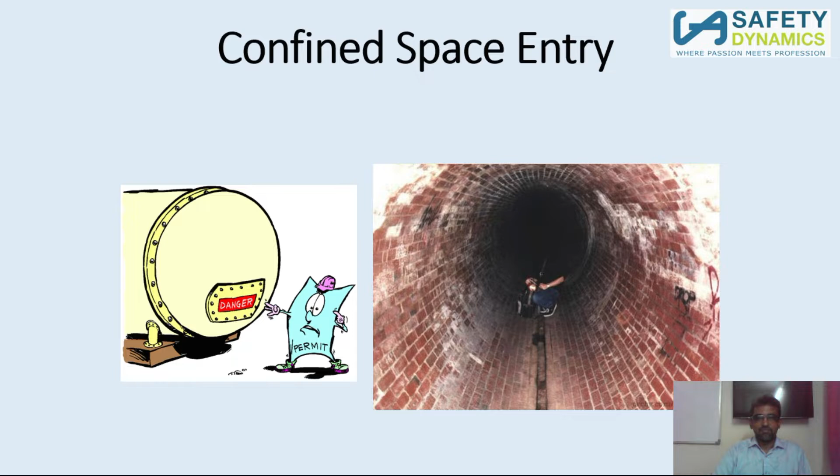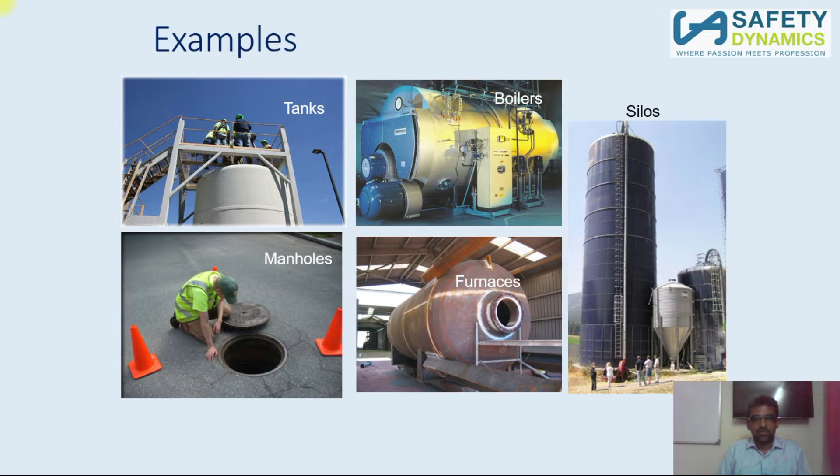Just see here. These are the types of areas. You can see tanks, boilers, silos or manholes. These all come under confined space mainly. That means the entry and exit could be a problem. You can also see sewers, septic tanks, pipes, cable galleries or trenches.

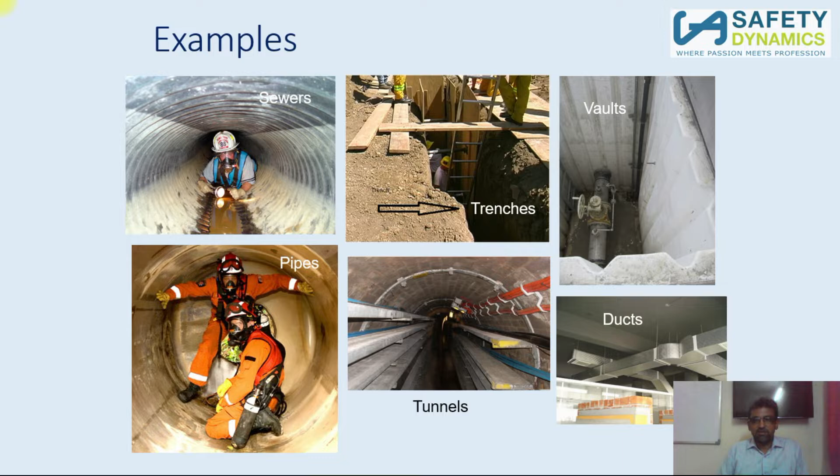Even an excavated surface. For example, in a construction area, when you're doing an excavation, up to a certain number of meters it could be taken as confined space. So we need to be all the more careful when getting inside the pit or any other areas. And ducting, for example, during air conditioning servicing or maintenance, when you are going inside the ducting, that is also termed a confined space.

There are two different roles in the confined space. One is called the entrant, the other is called the attendant. The entrant is supposed to go inside the confined space, and the attendant's responsibility is to ensure that he is safe. In case of any problem to the entrant, he must be in a position to rescue him. That's very important. He is not supposed to go inside.

Psychologically, there is a misconception that the attendant should also go inside. The attendant is not supposed to go inside. He must be waiting outside, and in case of any problem to the entrant, his ultimate responsibility is to ensure that the entrant is saved. So that is one important thing.

That is why in many areas worldwide, the attendant must have the knowledge and understanding of the entire nuances of English. He must have the capability and competence. A person who is not able to read and write English may be fit as a confined space entrant, but he will not be given the task of attendant.

Because as an attendant you need to check the oxygen supply, the level of oxygen, whether there are any contaminants, and how many people are inside. The logging, the logbook, everything should be maintained. So for that you need to have a basic understanding of language.

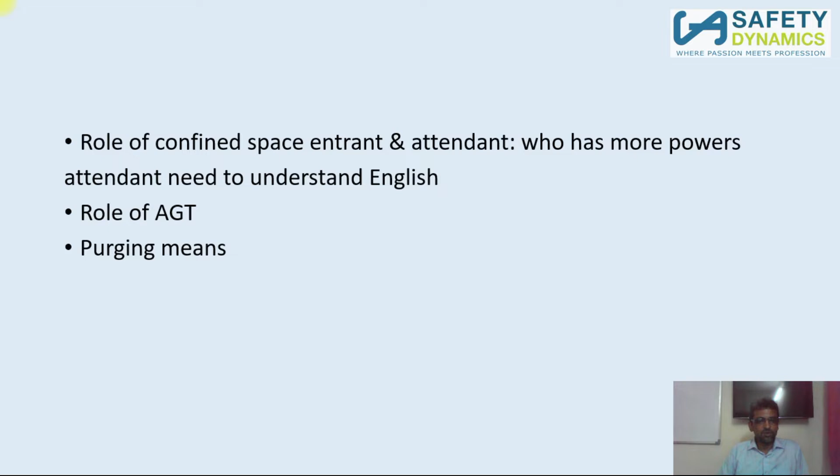One more important thing is the AGT. The AGT is nothing but the authorized gas tester. He is supposed to check the entire contaminant level and whether any toxic gas is present. Those are the things he is going to check.

And purging. Purging is a mandatory, important thing which is supposed to be done before entry into the confined space. Normally contaminants will be there. How will you remove the contaminants? It's a process of dilution. You remove the entire contaminants by diluting them with some other gas.

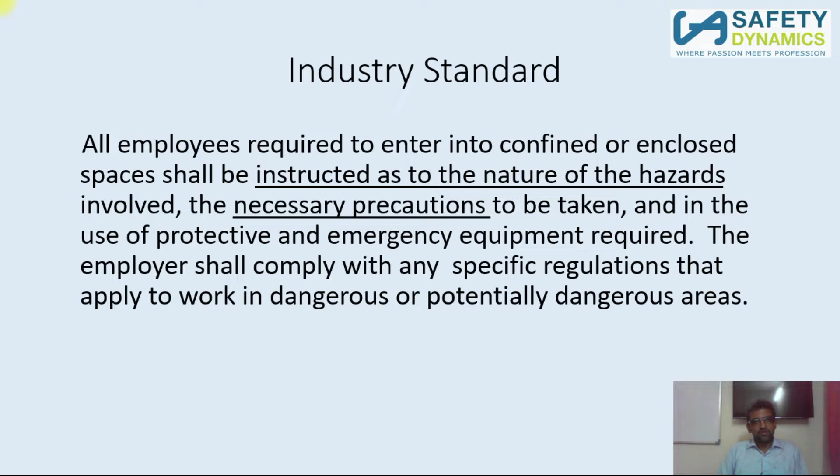What gas could be used? The best gas is N2. Pure N2, nitrogen, can be used because it will not react with any other gas. It's an inert gas. In some areas pure air can also be used. And precautions are taken.

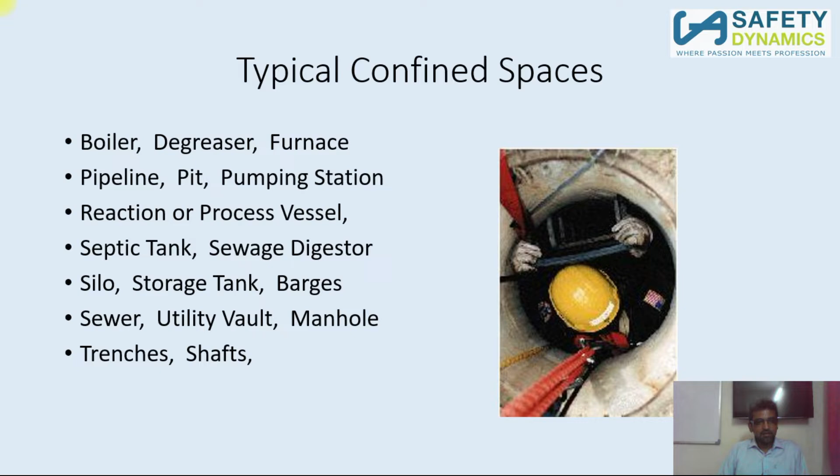And you know the sewage treatment, like water manholes, people getting in the manhole and cleaning, scavenging. So these are all coming under confined space. And limited openings for entry and exit, and unfavorable natural ventilation. Natural ventilation may not be able to enter properly. So that is an important thing.

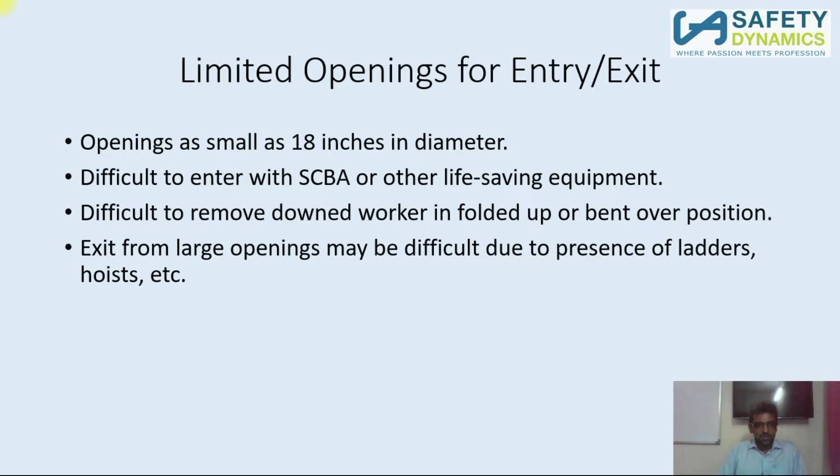And how about the entry? What could be the maximum diameter? When it is smaller than 18 inches, smaller than 1.5 feet, then that could be termed as confined space. And difficult to enter, the SCBA is very, very important. SCBA is nothing but the personal protective equipment that we'll discuss later towards the end of the session.

And the confined space definition, let us understand very clearly: it is large enough that an employee can enter and perform assigned work. If you are not able to enter inside, then there is no question of confined space entry. So it should be large enough, at least 18 inches, to enter, number one. It has limited or restricted means of entry and exit, that is second. And the third parameter is, it's not designed for continuous employee occupancy.

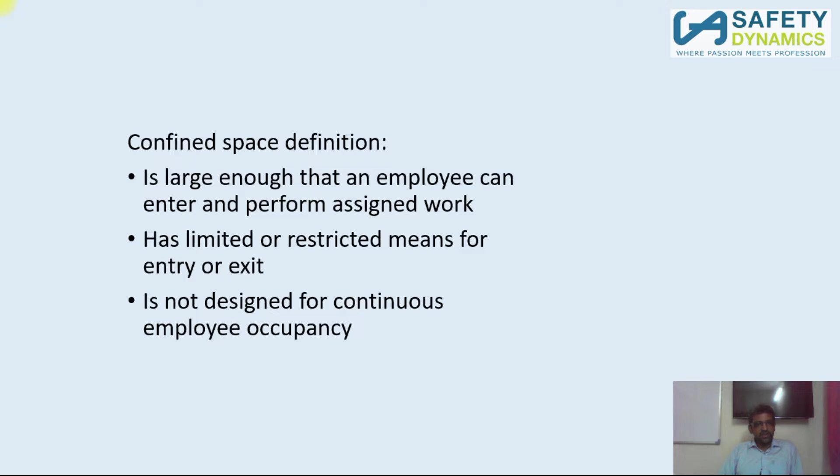So when any entry and exit falls under these three categories, that could be termed as confined space, and all the control measures should be taken care of in a sequential manner without any tolerance. So understand that. And this talks about the hazardous atmosphere. What are the hazardous atmospheres you will have?

There can definitely be fatality and impairment of ability, because if there is a toxic gas, it reacts with your hemoglobin. In the blood we have hemoglobin and oxygen. Hemoglobin is a fantastic guy, but the bad property is it has a greater affinity towards other chemicals than oxygen. If carbon monoxide is a contaminant, it reacts with carbon monoxide and creates carboxyhemoglobin. If there is H2S, hydrogen sulfide, it reacts with H2S and forms sulfhemoglobin.

So the reaction is so rapid that the person who is working will never be able to do the right thing. He will not be able to come out. So that is where we have to be careful. And engulfment is when suddenly some chemical or flowing solid or semi-solid content comes and swamps you totally. You wouldn't be able to do anything. These are the hazards we need to understand. And at no point of time should even 1% tolerance be permitted.

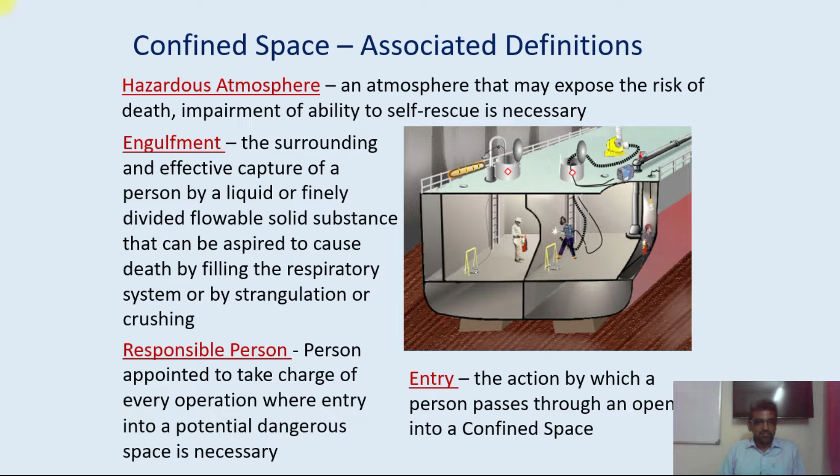Whenever there is an entry, you need to be wearing a proper coverall, safety shoes and the helmet. These are the primary requirements. Apart from the secondary protection, the final protection is the SCBA, and the tripod and the barricade should be there, and there has to be a notice. The signage should be kept very clearly that permit work is going on. And within the barricade area, I am not talking about the entry of the confined space, I am talking only within the barricade.

If somebody comes inside the barricade area without wearing the self-contained breathing apparatus, that is termed a dangerous occurrence. That means it is more than a near miss. A near miss is of lighter intensity, but a dangerous occurrence is of higher intensity which can result in death and fatality. So just understand the seriousness here. And it is not about the respirator; I am talking about the SCBA that should be worn.

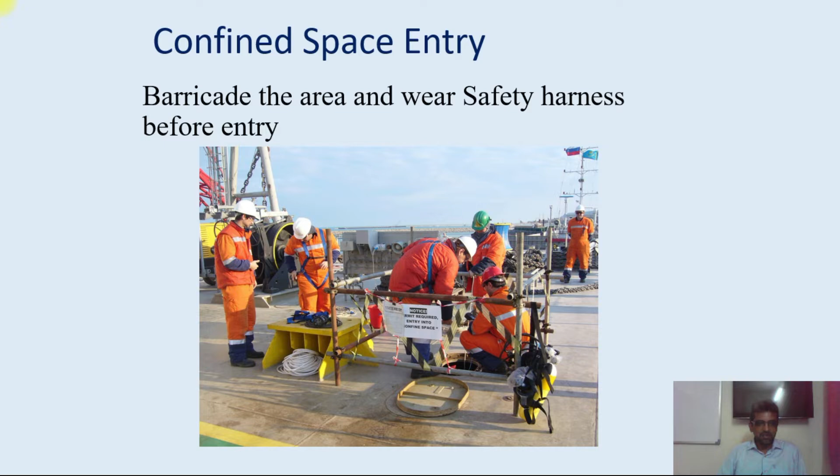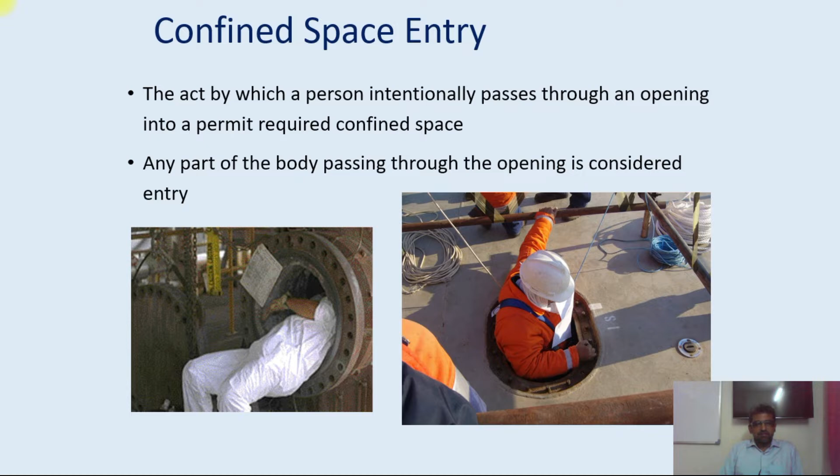As far as entry is concerned, there are two different ways of entry: horizontal entry and vertical entry. In case of horizontal entry, the person can go inside and come out, not a problem. He may have to bend himself to enter. For vertical entry, you need a tripod with a winch arrangement, and there has to be a rescue arrangement on the top. He must be wearing the SCBA to go down, and somebody else has to be available on the top to pull him out.

And what is the amount of oxygen we require for survival? It is 19.5%. When the level of oxygen goes down below 19.5%, it is called oxygen depletion. That means the level of oxygen comes down. When it is going beyond 23.5%, it is called oxygen enrichment. Either this side or that side, both are equally dangerous. When it is going below 19.5%, it can cause death. When it is going above 23.5%, then also it can cause death.

So what is the survival level? The optimal level is between 19.5 and 23.5. And as far as the confined space is concerned, there is one thing called IDLH, immediately dangerous to life and health. So what is that level? It is nothing but 17.5. 19.5 is the adequate thing. Up to 17.5% probably you can tolerate. After 17.5, the entire concentration is coming under immediately dangerous to life and health.

So you have to keep on monitoring the gas detector. By chance the oxygen level comes down below 19.5, you have to be cautious. When it comes down to 17.5, you have to come out immediately. There is no chance. Otherwise, you are playing with your life. So let us not do that.

And what are the combustibles? The most hazardous chemicals are hydrocarbons. There are methane, hydrogen, acetylene, propane, butane, isobutane, LPG. All these are your combustibles wherein you have to be careful while dealing with all these things. And there could be some toxic materials that we have discussed, and then electricity could be there, mechanical hazards can be there. Imagine you are doing some welding work inside the confined space.

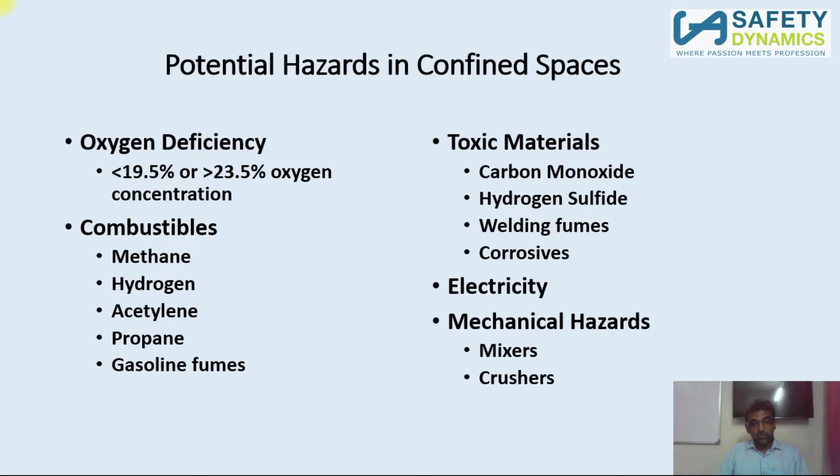Now at that point of time, as you are doing the welding, the fire spark consumes oxygen. So the available oxygen is already consumed, and at the same time you are also in the confined space, your oxygen level keeps on coming down. That means you are playing with your life. So by chance the oxygen level comes down below 19.5%, you have to be cautious and you have to ensure that you are coming out. And then only after dilution, only after ventilation with the blower and other things, then probably you can enter. Only after checking whether the oxygen level is sufficient as per the gas detection monitor.

Okay. So this is one simple example of how the oxygen is taken in the blood cells and how the CO2 we leave. Now the human body requires oxygen to carry out cellular metabolism. Without this you can't do anything. You will never be able to do anything. And how many minutes can we survive without oxygen? Imagine your entire mouth and nose are closed. How many minutes can we survive? Maximum just 4 minutes. 1, 2, 3, 4. That's all. Just 4 minutes we can survive. Not beyond 4 minutes. So within 4 minutes you don't require any first aid. You will be having life, not a problem.

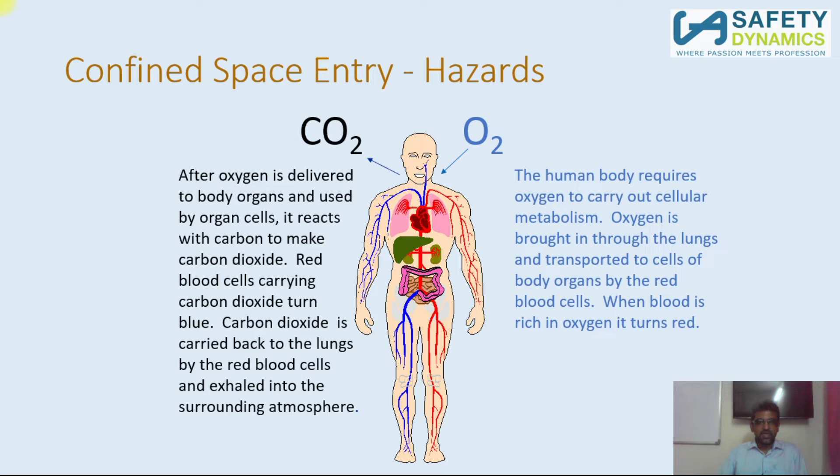Life will be there. Beyond 4 minutes, within 5 to 8 minutes, if I am right. So 5 to 8 minutes, let us take. So now between 5 to 8 minutes, if somebody is able to perform CPR, then probably there is always a chance of survival. Somebody should be ready to perform CPR. He must know about the first aid, resuscitation process. Then there is a chance of survival. If not, there is no chance. You will have to die. That's all. So we need to be careful.

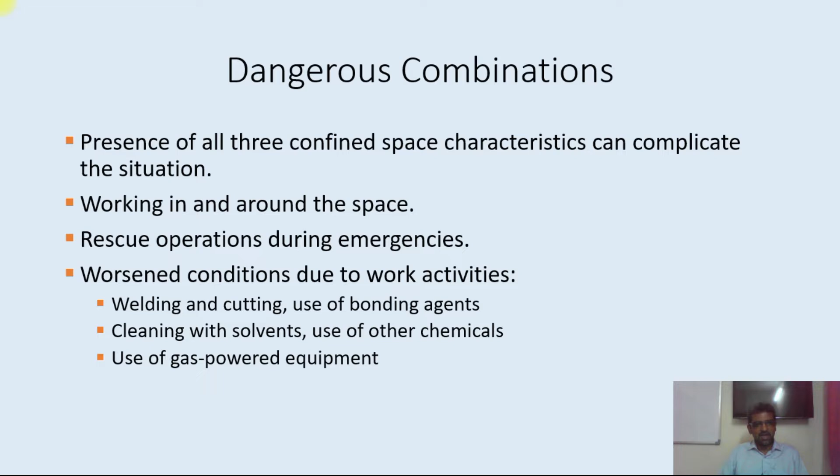And dangerous combinations. The presence of all the three confined space characteristics can complicate the situation. So that we need to understand, especially in the project stage, like when tunnel work is going on, construction sites are there. As you're doing the projects, a lot of hot work will be going on parallelly, and at the same time confined space entry will also be there. So we need to be careful, because when the prevailing hazard level is more than one, you need to be extra careful, definitely, correct?

And what are the problems here? Oxygen deficient atmosphere is a problem. Oxygen enriched atmosphere is a problem, and it can create a flammable atmosphere. Flammable atmosphere in the sense, there could be some vaporization. Imagine some petroleum container is open. Now the vaporization happens. At that point of time, if you give some source of ignition, what will happen? The vapor will blast like anything. It is not the petrol that catches fire, it's the petroleum vapor that catches fire.

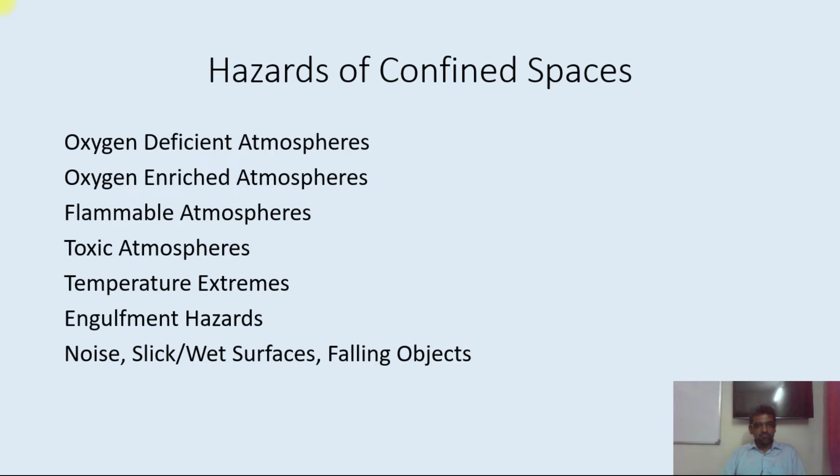And similarly the toxic atmosphere, carbon monoxide will be there. So a toxic atmosphere can be created. And temperature extremes, that could be on both sides. It could be hot or cold, and engulfment. And apart from this, there are various health hazards. Noise will be there, and wet surfaces, falling objects, all these things should be taken care of.

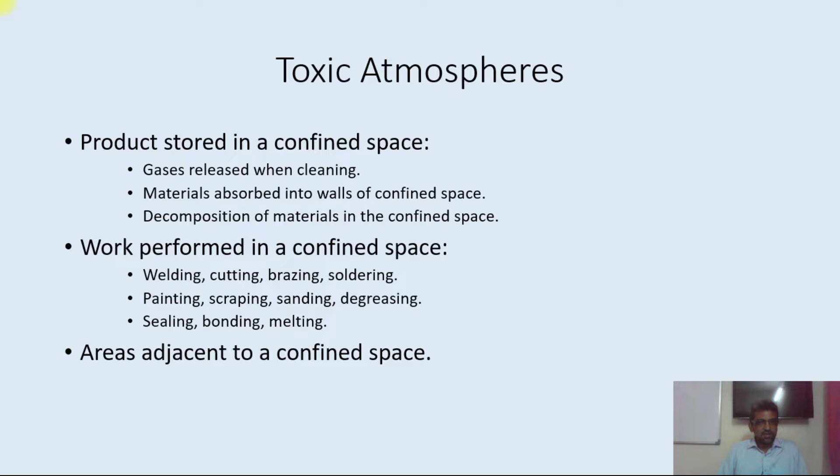And in a confined space, how could the toxic atmosphere be created? Just understand this logic here. The product stored: there could be some gases, some materials and other things. The work performed in the confined space, what is the work? And areas adjacent to the confined space, that we have to take care of. And this is one basic understanding of parts per million. What level of ppm is permitted?

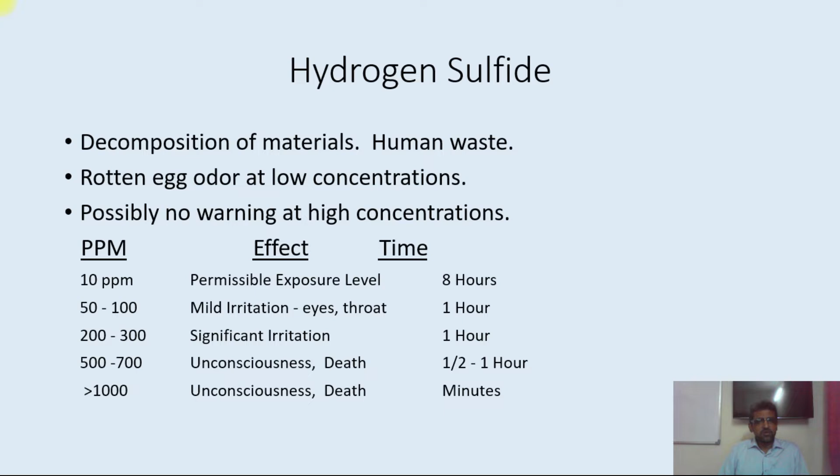So here, as far as hydrogen sulfide is concerned, 10 ppm is the maximum permitted level for 8 hours. By chance when it goes beyond that level, at some point of time, the central nervous system, that means the nerves that carry the smell of this H2S, will become deadened. So you will not be able to do anything. You wouldn't be able to understand the seriousness.

Carbon monoxide is a colorless, odorless gas, as good as this one. So what will happen? You will not be able to do anything. Here the personal permissible exposure level is 50 ppm for 8 hours. And as it increases, automatically there can be slight headache, discomfort, confusion, nausea and other things, and then after that the guy will die.

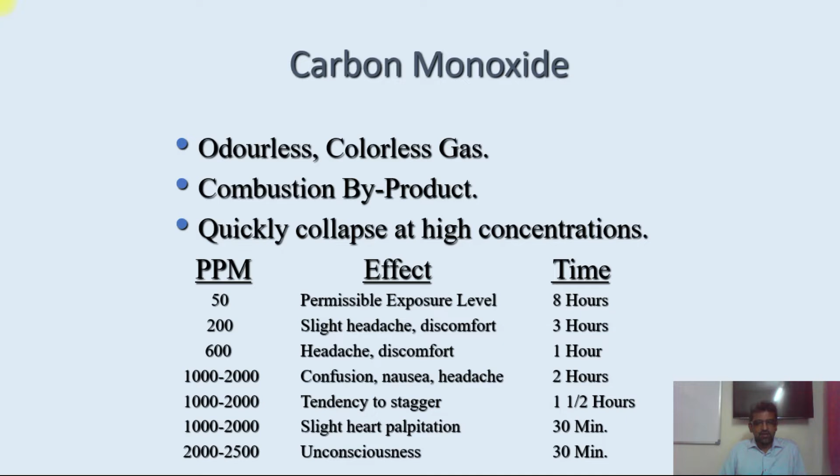So that is a critical factor, and that is why in all confined space entry nowadays it is mandatory that you should also have the AED. AED is nothing but the automated external defibrillator. Somebody should be able to perform CPR, giving the compressions. If you have the AED also, because the heart works on electrical impulses, when the heart does not work, if you are able to give an electrical shock at a predetermined joules level, there is always a chance that the heart will restart.

Fibrillation is always negative. That means the cells will have a jittering effect. There is always a problem with fibrillation, and the counter-attacking measure is defibrillation. That's going to be done by the AED. So when you're using an AED, a person should be there for CPR, and the AED is going to supplement the entire function. Correct?

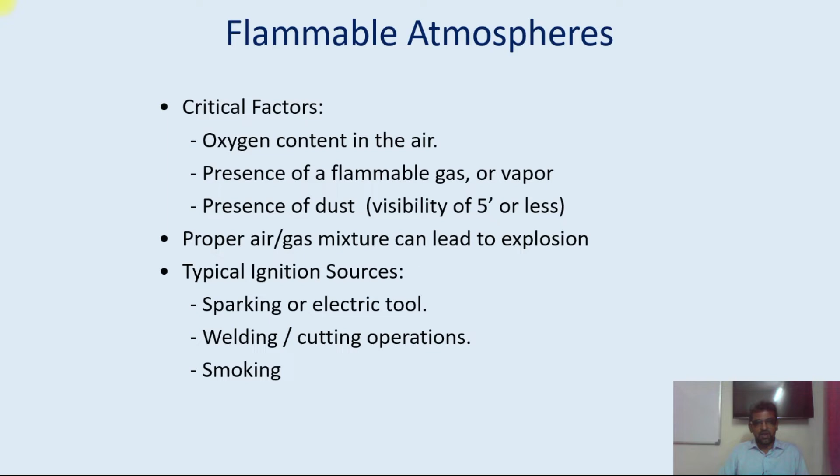And we talk about dust. We are not talking about normal dust. We are talking about respirable dust, where the particles are less than 7 microns. When it goes below 7 microns, it can go even to your internal organs, up to the lungs. So we need to be careful here. And then toxic atmosphere: the product stored in the confined space can create a problem, and that we have to take care of.

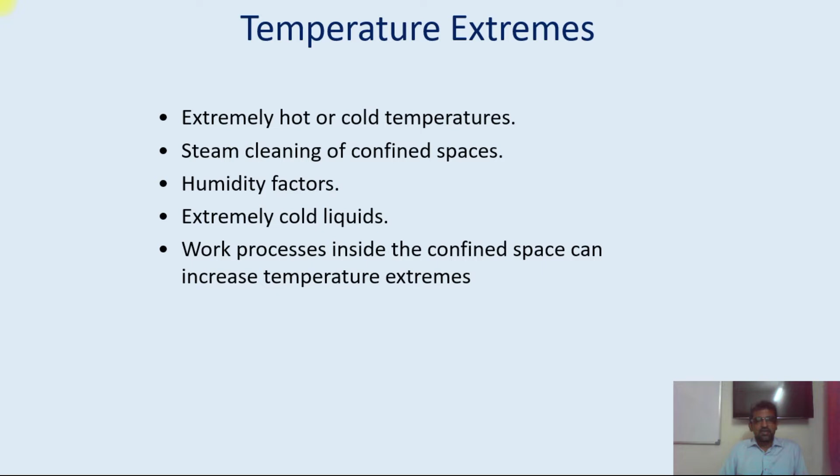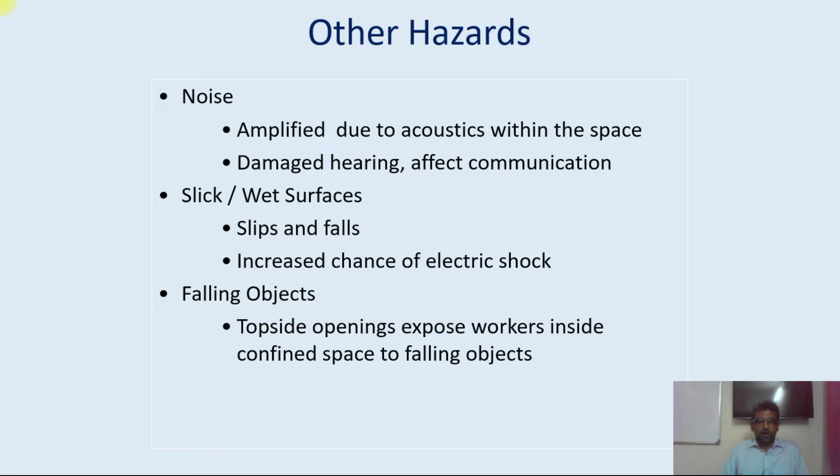Temperature, that we have discussed. Engulfment hazards we have discussed. Engulfment is loose granular materials crusting and bridging below the worker. And noise; these are the health hazards we were discussing. The noise should be taken care of, and wet surfaces should be taken care of. Falling objects, because in a construction site or process area something might fall. In offshore, dropped objects are one of the major hazards. So that also should be taken care of.

And how will you go? What is the control measure? What is the mitigation plan? How are we going to control it? Let us discuss reducing the risk of hazards. You will have to highlight the signage. Signage is very, very important. It should be easily understood, and as far as possible the text should be minimized. It should be pictorial, so language will not be a barrier to understanding.

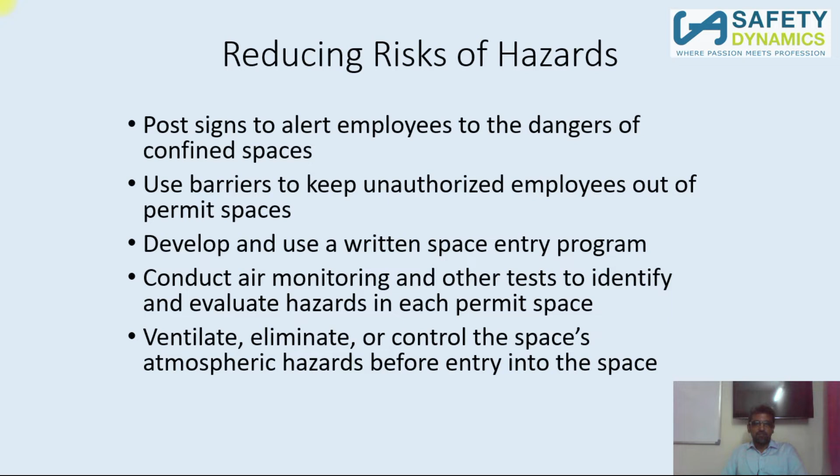And then barriers should be there, barricades. And the confined space entry program, that means a permit to work system; the documentation should be clear. And air monitoring with the AGT, and ventilate the area. And try to adopt the hierarchy of risk control: elimination, reduction, substitution, engineering control, administrative control, and last but not least, PPE usage. It shouldn't be like this, right?

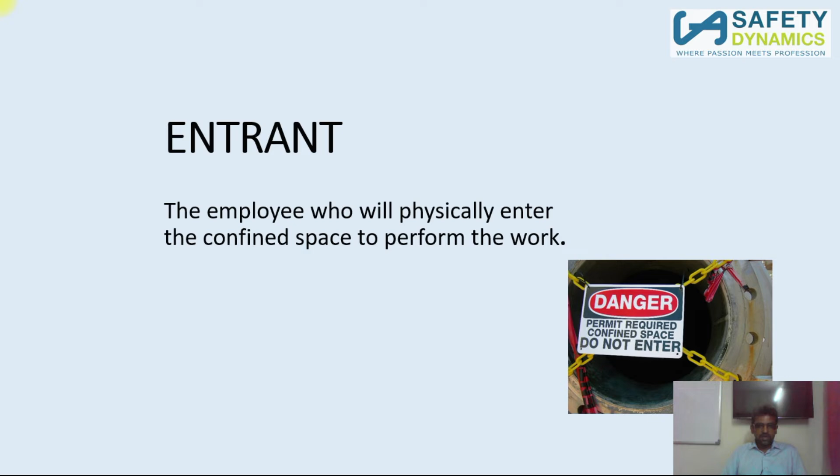You can see here in the slide, permit required. Before entry you will have to have a permit. Without a permit you are not supposed to go inside. The entrant will go through the tripod in the vertical entry, and outside your standby person will be there. What is the name of the standby person? The attendant, right? One is the entrant, the other one is the attendant.

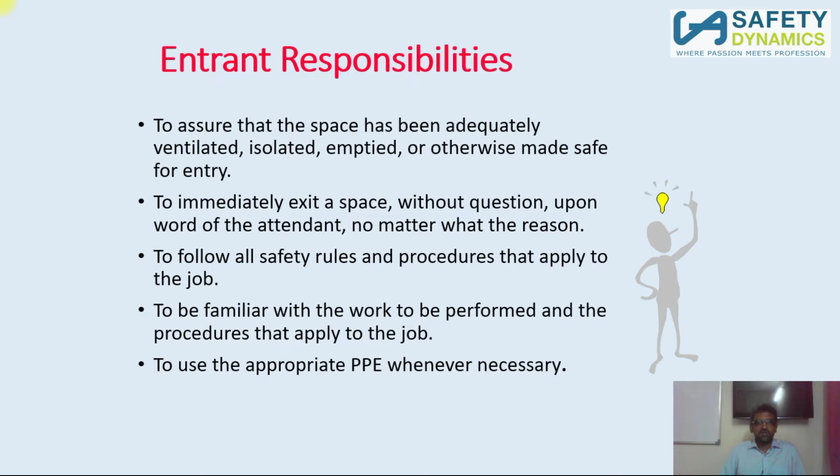So we need to be careful and ensure the entrant responsibilities are taken care of. Emergency - your life is very important. As you are going inside the confined space, your life is more important than anybody else. You must have the basic understanding and analysis. The moment you sense something is unsafe, just exit - you must make an exit. There is no second thought on that. And follow all safety regulations.

The entrant is about to go inside while the attendant is already waiting outside, monitoring the entrants during the job and entry. The attendant may not abandon his post for any reason - he is not supposed to go outside or leave the place, even if another emergency happens. He can only caution the people. That's why emergency arrangements should be ready outside, and he can summon the emergency services immediately, but he is not supposed to go inside.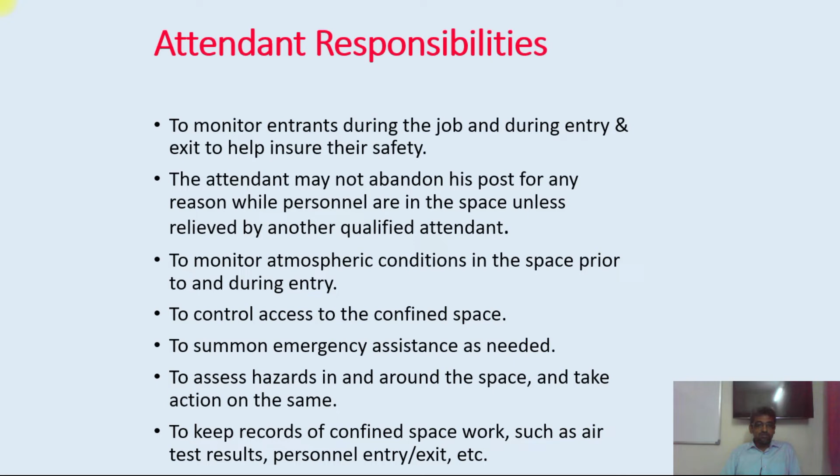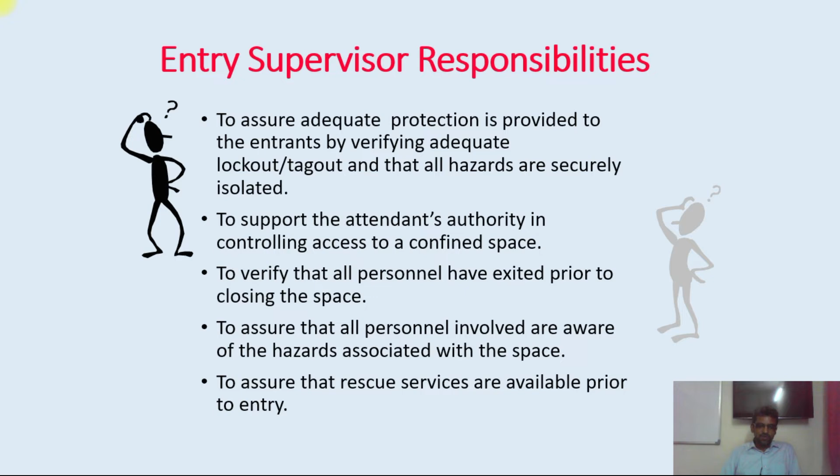Records - everything should be there. The log books and other things should be kept intact without any deviations. The supervisor's responsibility is to ensure adequate protection is provided, energy control mechanisms like lockout tagout should be used, and attendant's authority should be taken care of - how many people have gone inside, how many have come out, how many entered, how many exited - everything should be maintained properly. That's the responsibility of the supervisor.

What are the two different options for entering confined space? One is permit required, and the other is non-permit. Non-permit required entry is a very non-hazardous thing. It might be a confined space, but no hazards will be there, and probably a limited time of entry - that could be possible.

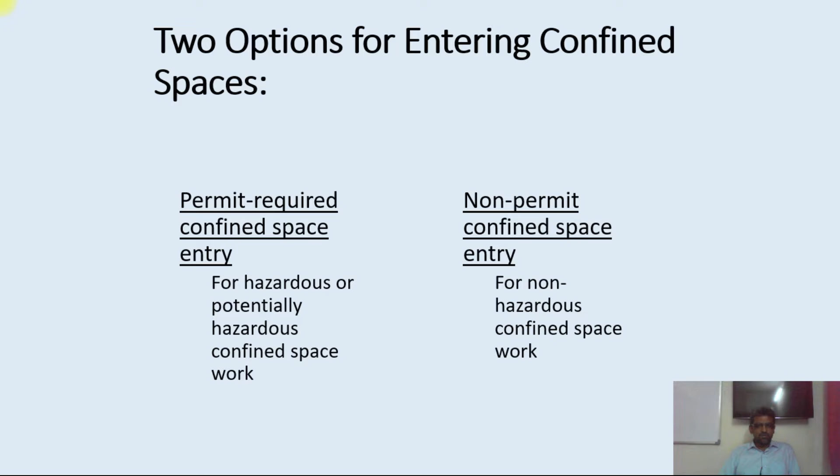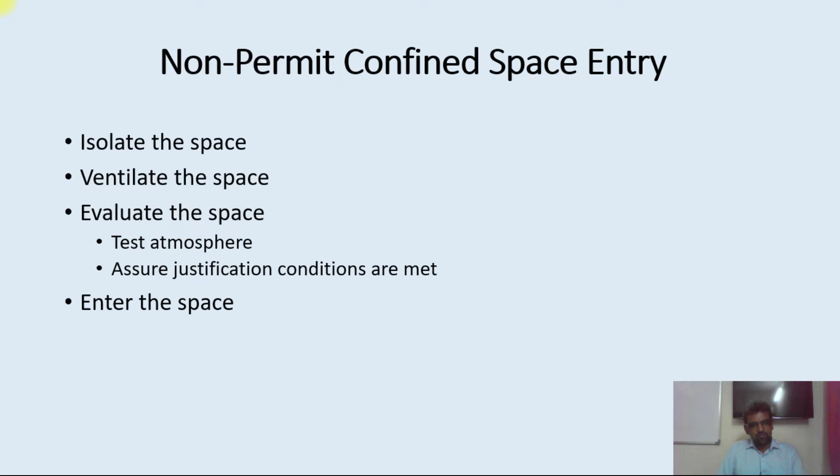Wherever the permit is not required, you can isolate the space, ventilate the space, evaluate the space, enter the space - isolate, ventilate, evaluate, enter. Isolate means put the barricade so nobody comes nearby, then ventilate - start ventilating by means of dilution or a blower - then evaluate, check the thing. Evaluation means checking if there are any other contaminants available, what about the gas level, everything. Once you are clear and rest assured, then the entry can happen.

How can the isolation be done? Closing the valves - the energy control mechanism should be taken care of so stored energy is not there. Closing the valves, emptying the space, lockout tagout should be taken care of, and then you can also clean the residue.

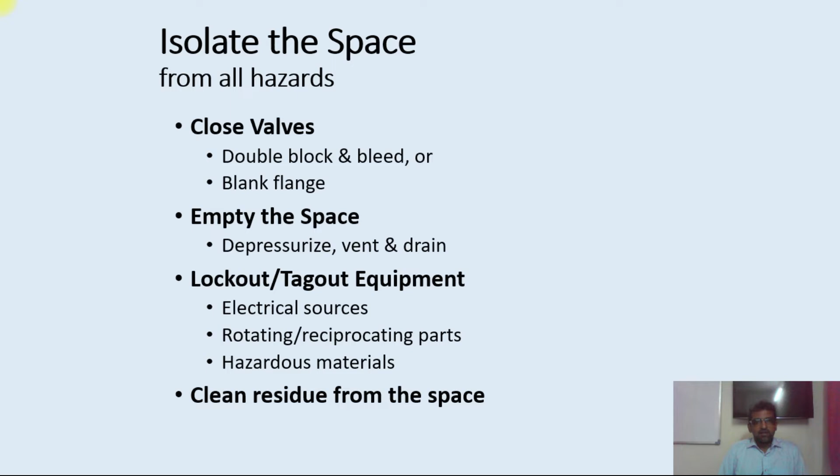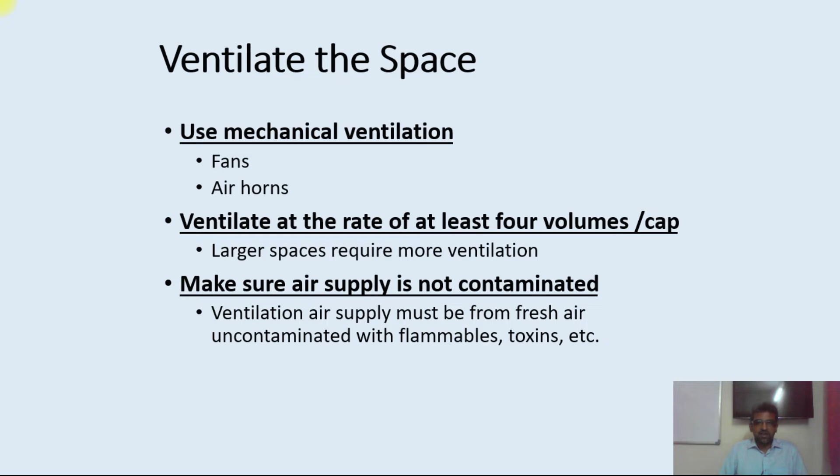And the next one is ventilation. Ventilation is using the blower or any other mechanism wherein the contaminants are diluted - that's all it is. Ventilation air supply must be from fresh air; it should not be contaminated with any other material available inside.

You can see there are different types of blowers. In mines, cable galleries, or process industries where petroleum products are stored, you may have to clean that area. At that point, the SOP says clearly: after understanding the hazards, immediately prepare the documentation, select the right people, then blow the entire area with nitrogen, pure N2. The concentration of contaminants will come down, then check the oxygen level, CO level, and H2S. If you are safe, then you can go inside.

This gas detection monitoring is a continual process - it is not just at the point of entry and point of exit. It's continual; during the process of work as it's going on, you need to keep checking this. When the level comes below a threshold, it will alert you. So be careful, let us not take anything for granted, because the confined space is categorized under high hazardous category, and in some areas it's categorized as special hazard category.

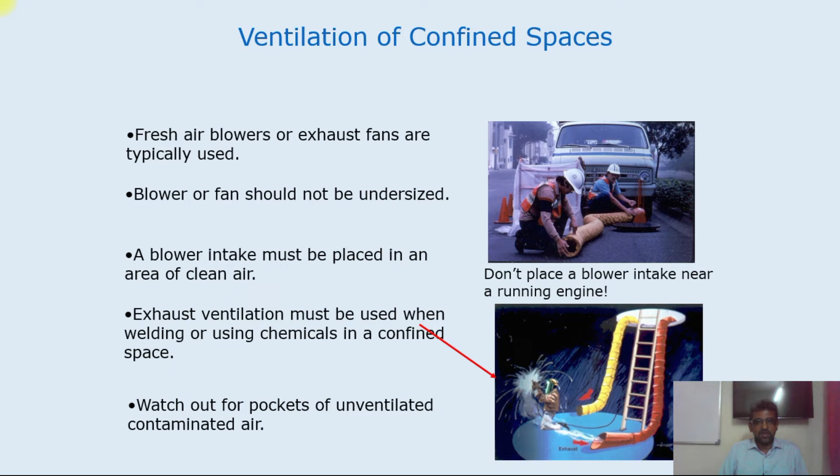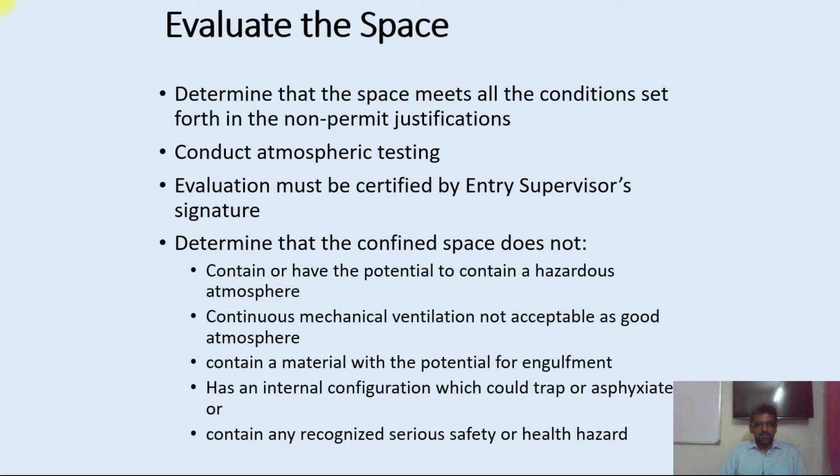So we have to be careful. And evaluation - how do you do it? Determine the space, you will understand. The atmospheric testing, once you do it, you will be able to understand where all the hazards are, and then take up control accordingly.

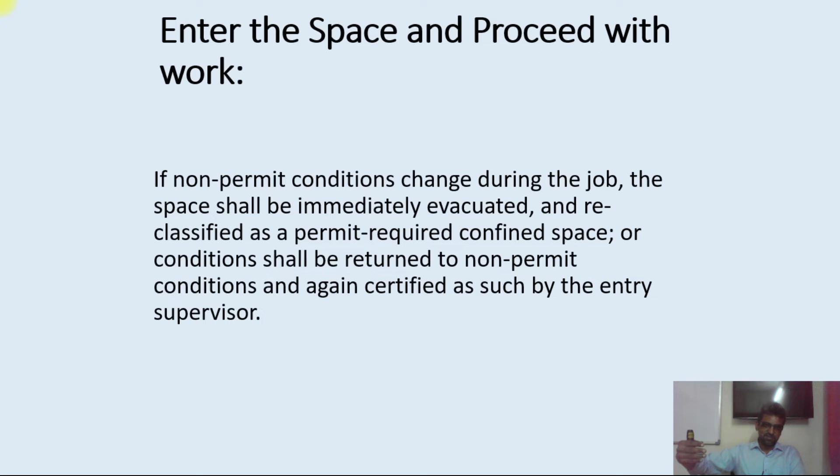In non-permit conditions, if the situation changes during the job, the space shall be immediately evacuated and reclassified. By chance, if as you are doing the non-permit work you feel that hazards are slightly increasing, it has to be categorized under permit required. From non-permit, it migrates to permit required, and whatever the SOP says, the standard procedures given, you have to follow the entire thing without any tolerance.

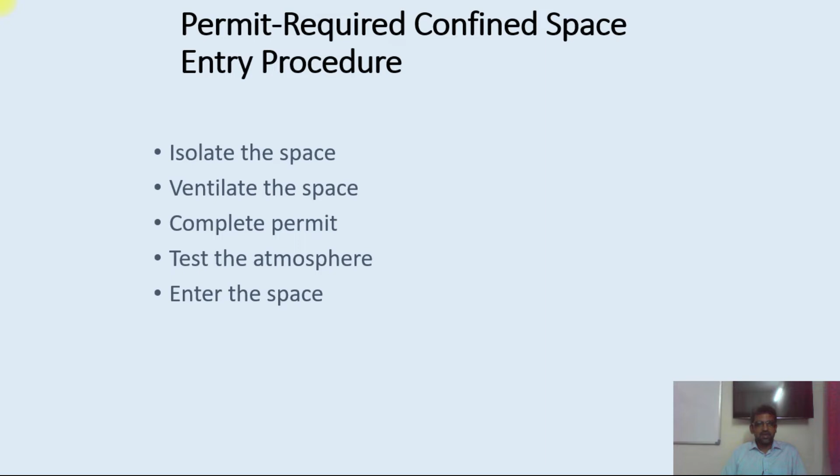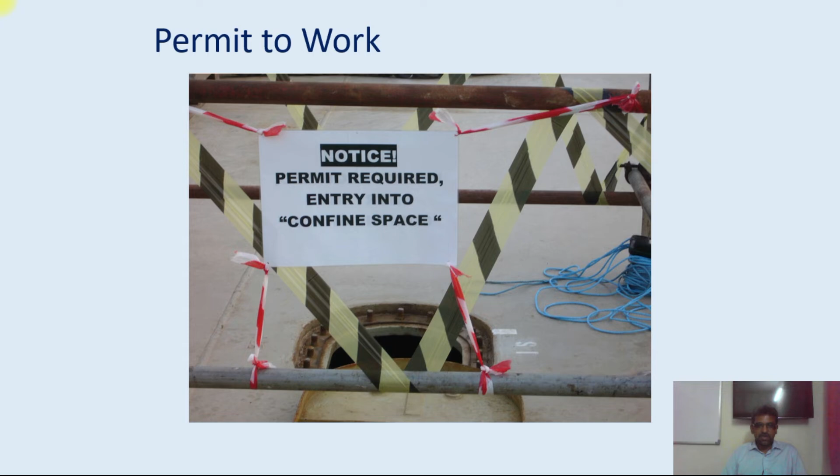Isolate, ventilate, complete, test the atmosphere, and then enter the space. Correct? These are the things we've already seen. Just once again for reinforcement, because it should be manifested. At any point of time, understand it should be a barricaded area, with very clear signage, and no one should enter that area. If somebody has to enter the confined space within the barricade, he must be wearing the SCBA. So this is one summary of the entire thing in a hierarchical manner.

So emergency services, what about the rescue service, what about the communication procedure? Can I use a mobile inside the confined space? You're not supposed to. Then how will you communicate? Can you use a walkie-talkie? If possible. But if not possible, then what is the best communication method?

You will not be able to shout, because as the person is losing his consciousness, about to lose consciousness, he will not be able to communicate by shouting. So at that point of time, the moment you are wearing a rescue harness, you also have a lifeline, and if you start shaking the lifeline, correct? If you have continual shaking, that means it's an understanding that you are in an emergency, and the attendant's job is to pull you out.

So as far as possible, there is a very clear way of communication. That means you must be able to see the attendant. If that is a straight line of communication, it's fantastic. If it's not possible, there is always an L bend and U-turn, everything within the cable gallery or the confined space area. You will not be able to contact the confined space attendant directly, but as far as possible, try to have a clear line of contact. And one basic understanding I need to say is, you know pretty well there are various permits out there.

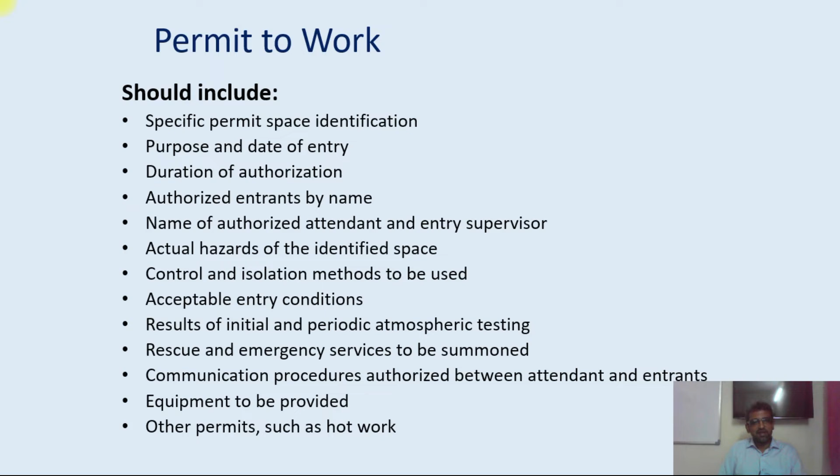It can also be called an ancillary permit. Imagine you are working at height, you need to take the permit for work at height. At the same time, you may also be doing some cold work permit. But which one is predominantly important? The main permit will be given for work at height, and the other one can be taken as an ancillary permit, or attachment. So you need to understand where exactly the priority should be given. The priority should not be given to the second or third level area, it should be given to the first one, the top one.

Permit work must be completed before any confined space entry. Safe working practices are all used as reasonably practicable, as far as reasonably practicable. That should be taken care of. Permits will be for a limited duration, and will not be valid for more than 12 hours. Normally, the permit work documentation loses its sanctity beyond sunset, after demise, after sunset it loses its sanctity.

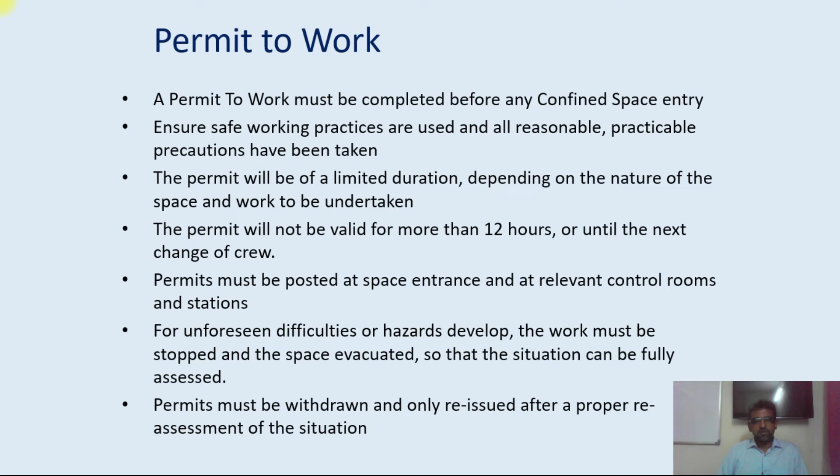But ultimately, after that, because of continual work, working 24/7, there is no point in sunset and sunrise as such, so we always do the renewal. Each and every shift, before the shift starts, the supervisor has to revalidate the permit. Otherwise, 12 hours we can take it. Permits must be withdrawn and reissued after a proper assessment of the situation. That's called revalidation, so that we need to understand.

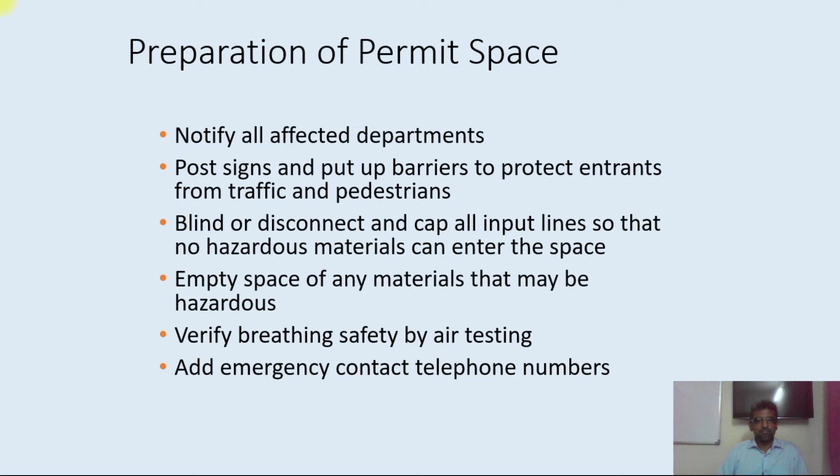And preparation of the permit space: notify all the affected departments, post signs, blind or disconnect and cap all those things, empty the space, verify breathing air. This should be taken care of. Then atmospheric testing, you need to check the oxygen level at 19.5. This we have already discussed.

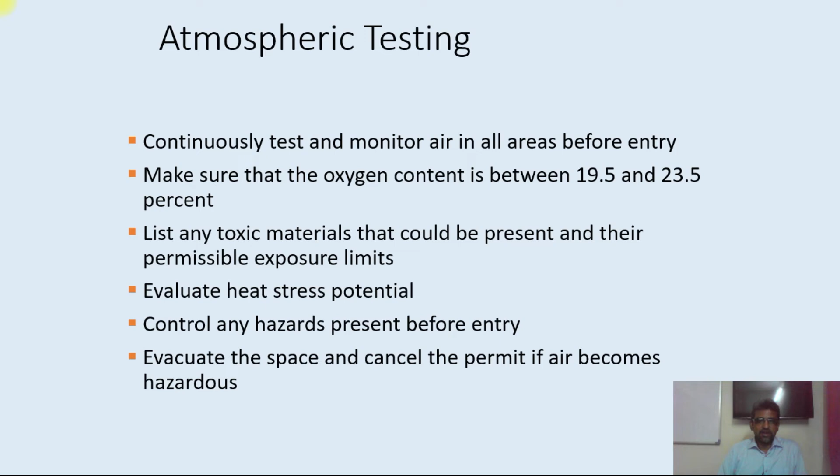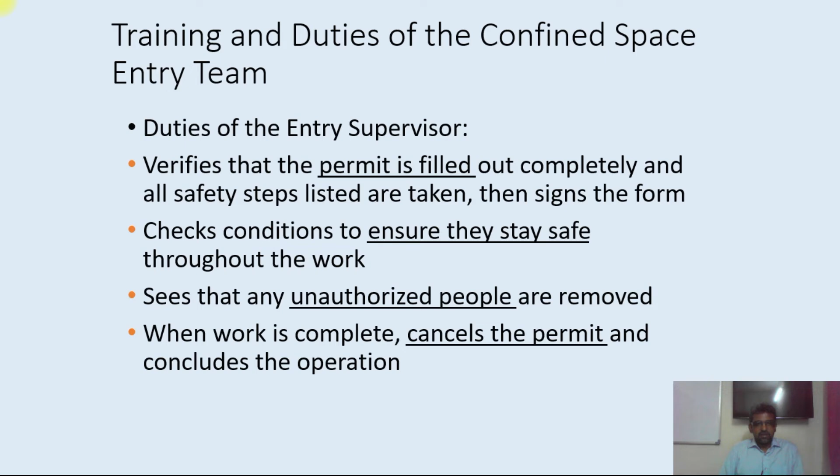The permit should be filled properly and ensure they stay throughout the work. Unauthorized people should not be there, and cancel the permit in case if the work is completed.

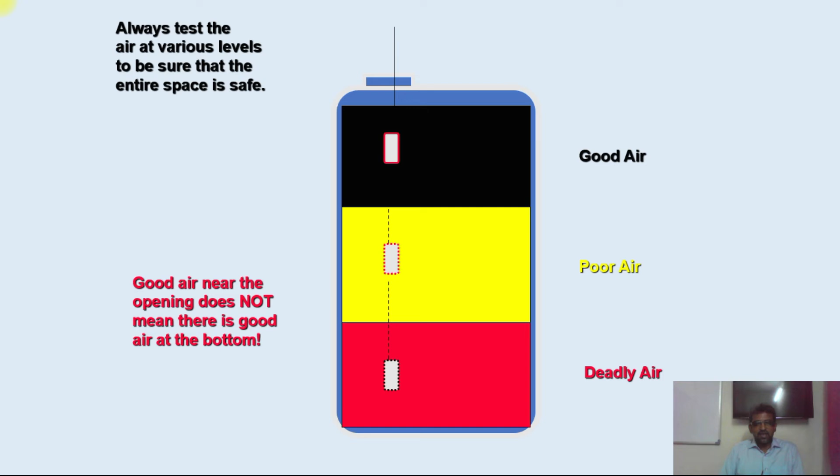This is just a color category of the air quality. Good air will be denoted like this, and the poor air or deadly air like this. So we need to take all the control measures according to the gas level.

The problem is, since it affects your nervous system, CNS, you will never be able to do anything. Other people may think you could have done like this, but ultimately, since your CNS is going to be in problem, whatever action you are taking, you might think, but you may not be able to implement it.

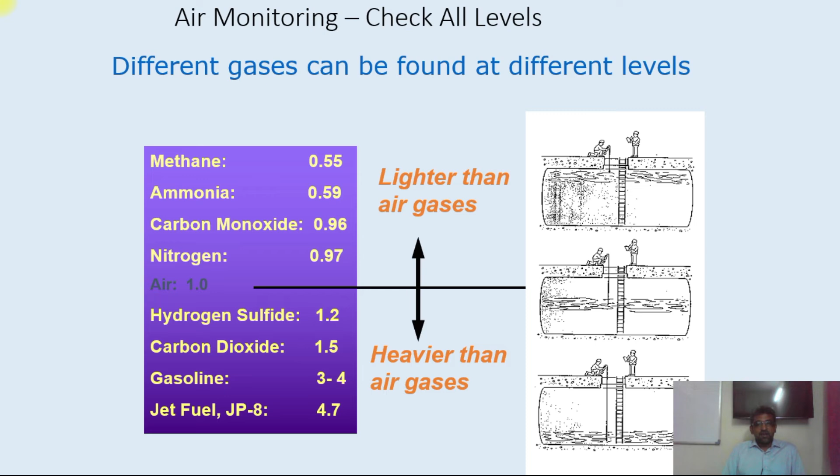So different gases can be found at different levels.

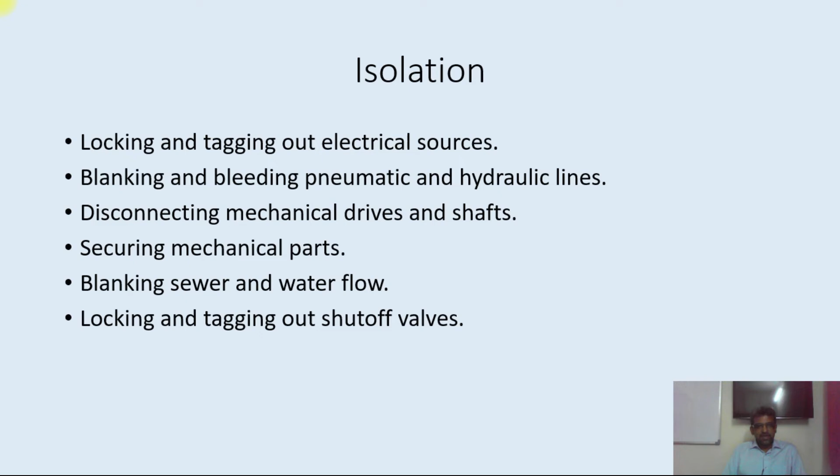Isolation, locking and tagging out electrical sources, blanking and bleeding pneumatic and hydraulic lines, everything that you can take, you should take. And let us understand the personal protective equipment.

There are two things: one is the normal PPE and the other is the respiratory protective equipment, RPE. RPE also has different types. One is the canister type, and there is a cartridge type.

For confined space, these are not supposed to be used. You will have to go only for the SCBA. It is always better, but according to the type and nature of risk, probably you can also use respirators based on the suggestions and recommendation by your team.

Imagine if you are wearing a respirator with a continual supply, the compressor will be outside, and you will get a continual supply of air, oxygen. So then you can definitely go in with this one. Correct?

And this is a standalone one, like a self-contained breathing apparatus. This will have breathable air for about 45 minutes max and 30 minutes minimum, and you can go with this one.

The understanding of advantage and disadvantage between the SCBA and the supplied air breathing apparatus: in the supplied air, you will get a continual supply of oxygen because the compressor is always running, so you don't have to worry about loss of air.

With SCBA, you have got air only for 45 minutes, so that is a disadvantage. As for the advantage, because of the hose which carries the oxygen air, there could be some problem in the hose - if any kinks are there, probably the supply will be affected. So with SCBA you don't have to worry about this because it's a standalone unit.

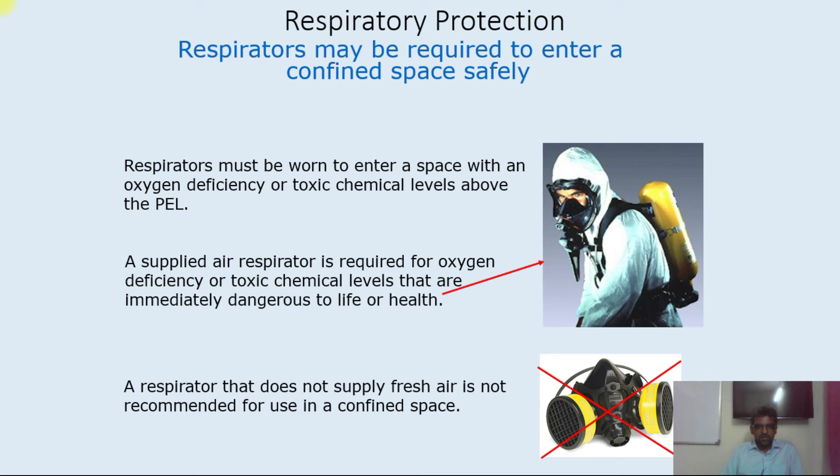So the available air is 21% and the IDLH is 19.5%. That you have to take care of. And the standby and rescue arrangements, how you are going to do that, we need to take care of.

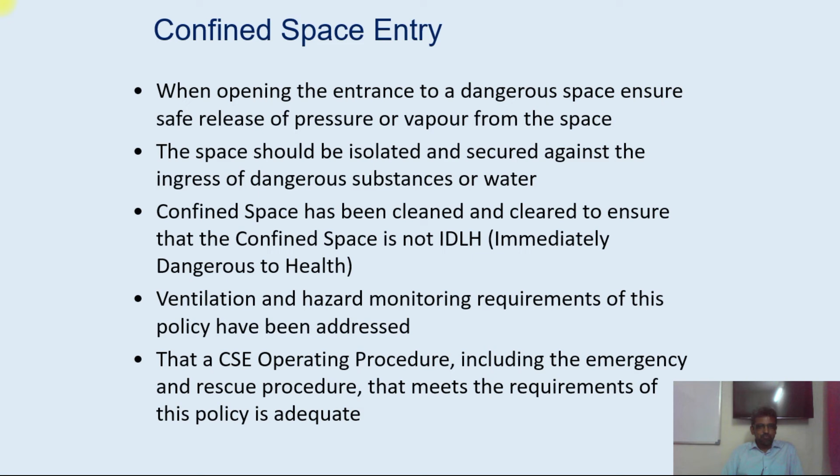For confined space entry, when opening the entry and exit, dangerous space should be considered. IDLH we have discussed already, and the operating procedure should be taken care of. I think we have covered everything - is there any specific questions on this?

Line of sight or other continuous two-way communication method shall be established. Line of sight in the sense the entrant must be able to see the attendant. That's important.

Because if the line of sight is not available, as far as possible the line of sight is always better. In case the line of sight is not available, you will have to have another person also in between, so probably you will have to take the assistance from other person also.

Your gas detection we have discussed earlier. What gases will it give indication of? It will give the indication of oxygen level, and then of course CO, and then H2S, and it will also give the LEL. LEL is the lower explosive limit of any other contaminants - any other vapor will also be there, so that contaminants concentration should not go beyond 10%.

When you are reading something more than 10% of the contaminants in the gas detection monitor, you need to come out. You are not supposed to enter.

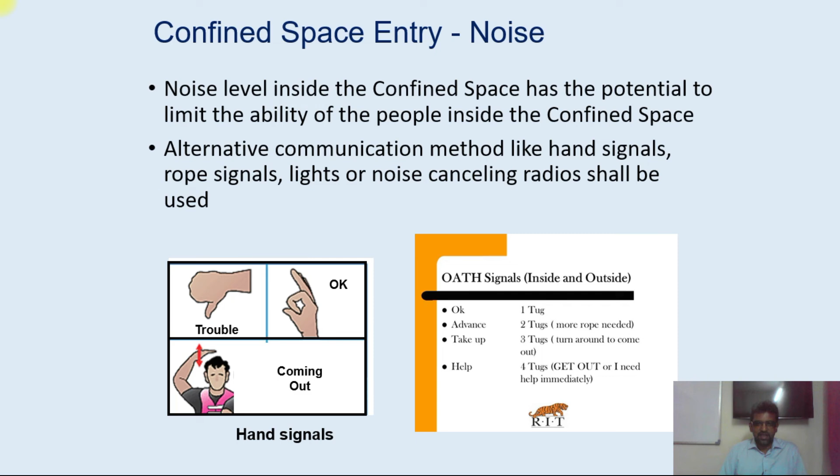How the signals can be given here, I was telling you, like you are going to give a tug - that means you keep on shaking the rope. For one tug it is called OK, and if you keep on doing three tugs and a continuous thing, that means you will have to come out.

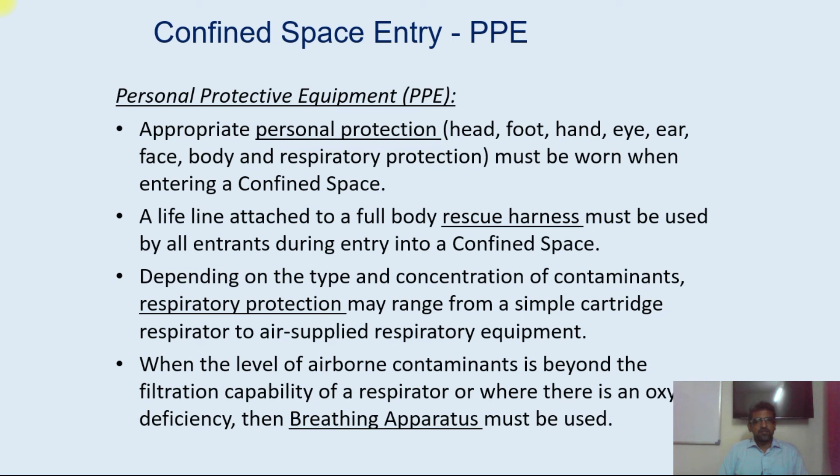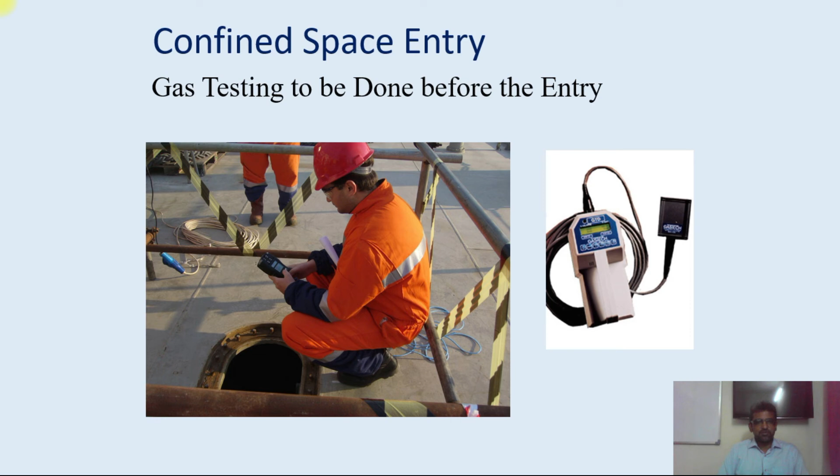And we were discussing earlier the personal protective equipment that should be taken care of, the respiratory protection and the breathing apparatus. Gas testing is to be done before the entry, and only after doing the gas testing are you supposed to go inside. Otherwise you can't. You will never be able to enter the confined space.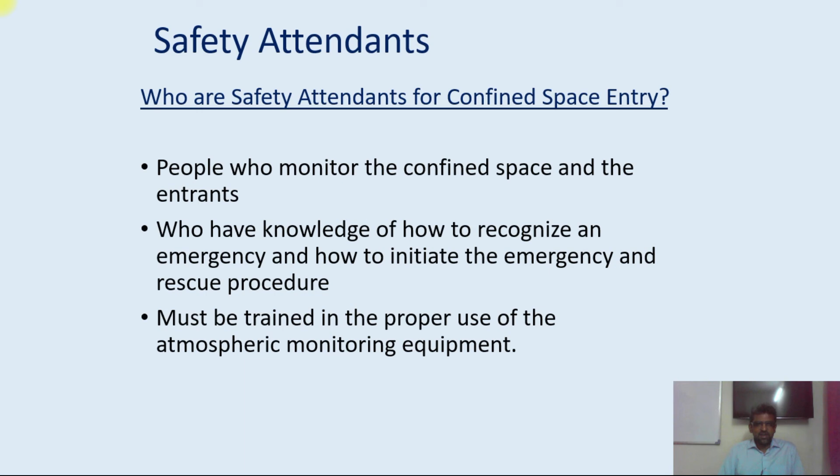And safety attendants, people who monitor the confined space, must have knowledge on how to recognize hazards and must be trained in the process. The training, implementation, and understanding the logic and nuances is more important than anything, because you are playing with life. So as you are entering the confined space, you need to be very clear.

Apart from that, the oxygen level should be checked. What is the amount of oxygen we have in the atmosphere? 21%. Up to what level can we survive? We can survive only up to 19.5%. But of course, confined space IDLH is 17.5%. CS IDLH: confined space immediately dangerous to life and health is 17.5%. When it goes below 17.5%, it is the ultimate responsibility of the entrant to come out without any delay, because every second is very important.

Because the toxic gas, carbon monoxide or H2S, reacts with the CNS, and your reaction mechanism will be totally different. You will not be able to do anything. You might think, okay, I will be able to pick up something, I will be able to come out. But you wouldn't be able to do anything because the entire system is totally knocked down.

And as far as the responsibility of people is concerned, the confined space entrant will be in a position to enter an area where the diameter is not less than 18 inches. And what is the responsibility of the attendant? He has to ensure that everybody inside is safe, how many people have gone inside, and he has to check that rescue measures and other things are taken care of. And the attendant should never enter inside. He is not supposed to enter the confined space at any point of time, point blank.